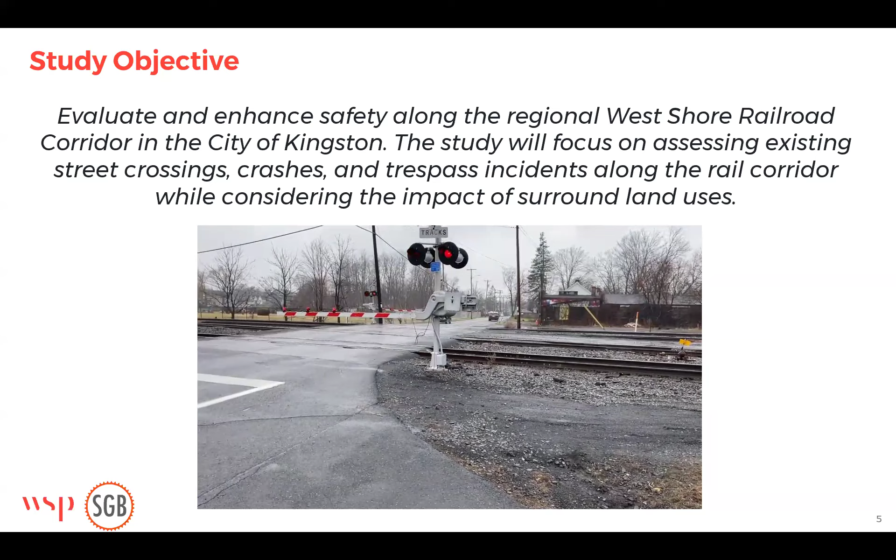So I just wanted to play that video for you guys, and I am very loud, but I cannot compete with that train horn.

But for our study objective, it really was to evaluate and enhance the safety along the regional West Shore Railroad corridor in the city of Kingston. We did focus on assessing existing street crossings, crashes, and trespass incidents along this rail corridor.

Highlighting that video, a lot of what we saw in our crash data dealt with driver frustration due to having to wait at these grade crossings. As you could see in this video, one of the vehicles just made a U-turn and decided to go elsewhere because they didn't want to wait.

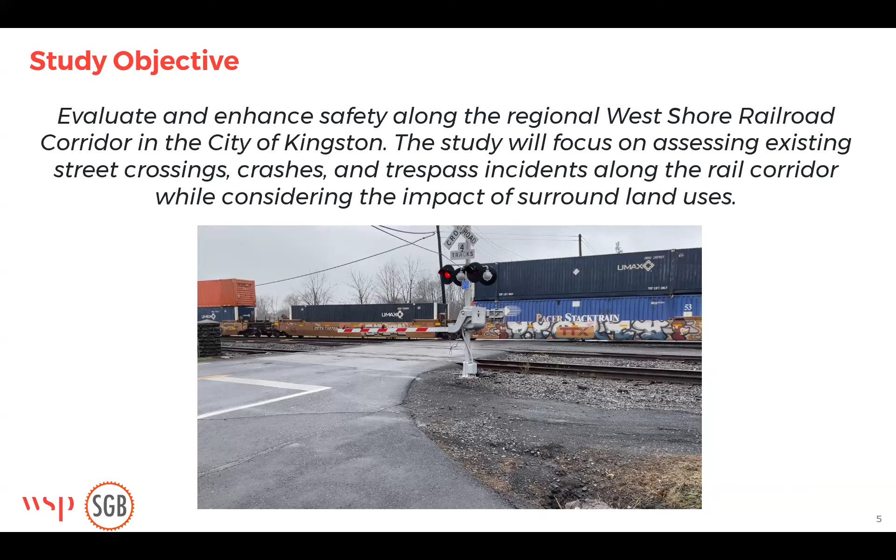As part of our study, we also looked at and reviewed past studies performed in the city of Kingston, including the 2006 Quiet Zone Study and Pedestrian and Safety Mobility Analysis, the 2008 Ulster County Integrated Advanced Train Detection Study and Implementation Plan, the Boice's Lane Rail Crossing Study, the recent Safe and Accessible Flatbush and Foxhall Study, as well as the 2045 Ulster County Comprehensive Plan.

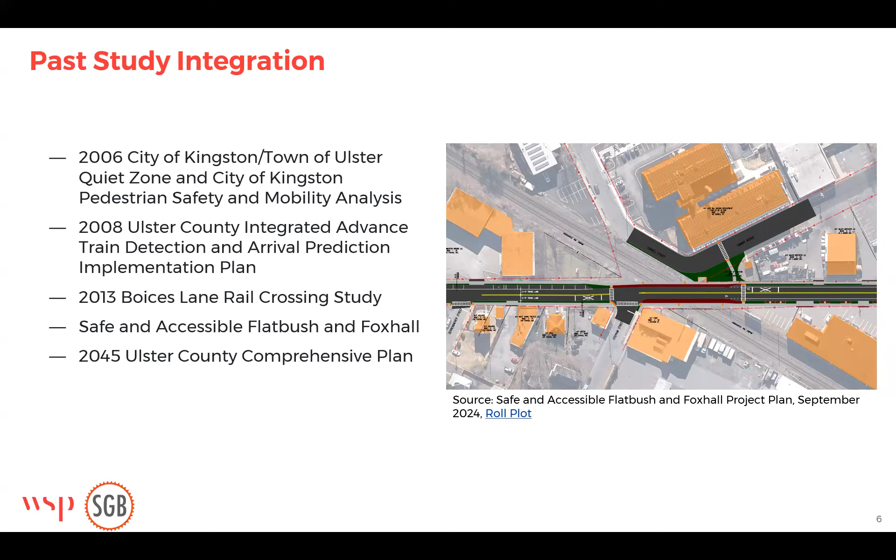Next, if you haven't joined any of our previous public engagement meetings, we did prepare a study video that will go over some of the existing conditions that we developed as part of this study.

Everyone, my name is Steve Noble, and I'm the mayor here in the city of Kingston. The Ulster County Transportation Council is undertaking a rail crossing study to help evaluate and enhance safety along the CSX rail corridor here in the city of Kingston.

We are so excited to be able to get the public's input on the existing conditions and movement of people and vehicles across and alongside our tracks. The public outreach meetings intend to bring constituents and key stakeholders together to help understand how people interact within the corridor. Your presence and expertise will be invaluable to this conversation.

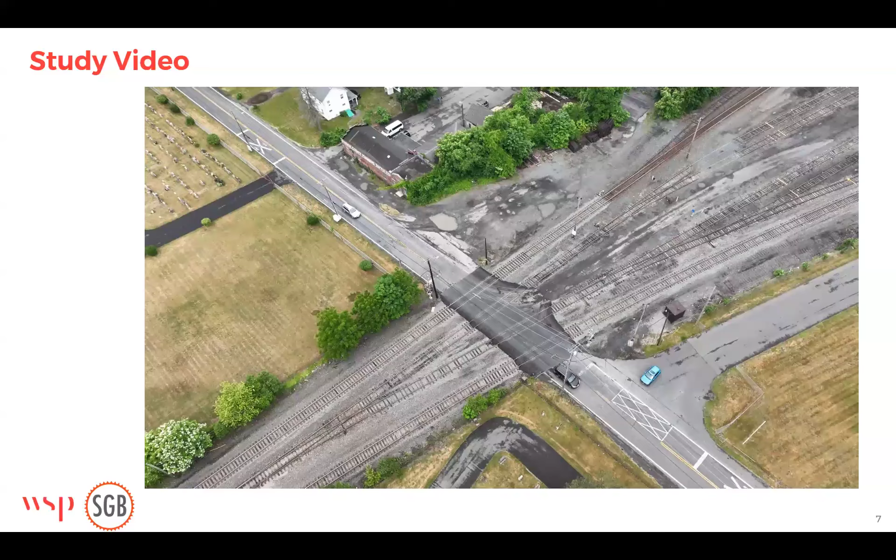The Ulster County Transportation Council is undertaking a rail crossing safety study to assess and improve safety along the regional West Shore Railroad corridor in the city of Kingston. The study will focus on assessing existing street crossings, crashes, and trespass incidents along the rail corridor while considering the impact of surrounding land uses.

Rail corridors in urban areas are common in the U.S. The CSX rail corridor runs through the middle of the city of Kingston and provides challenges for residents and visitors who cross from west to east or vice versa. WSP, in association with SGB, was hired to review the rail corridor and evaluate specific areas for ideas to improve the safety of crossing the rail corridor.

Review of preliminary data and site evaluation indicated that at least 3 areas stand out as focus areas. The first is alongside the tracks between Flatbush Avenue and Cemetery Drive. The second is the at-grade crossing at Foxhall Avenue. And third, the area south of Broadway.

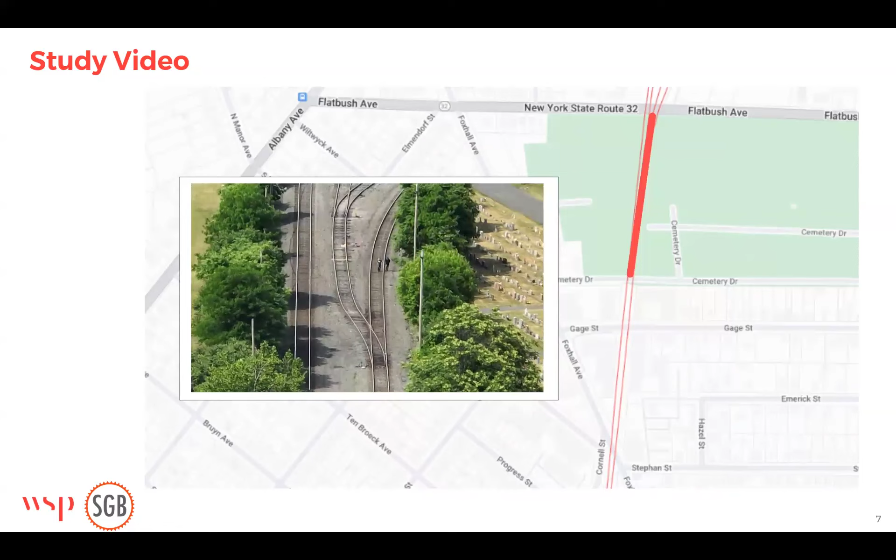The contributing factors in these 3 locations are very different. In consecutive field visits to the study area, trespassing was observed from the at-grade crossing with Cemetery Drive along the rail corridor to the at-grade crossing with Flatbush Avenue. There are known origins and destinations to the northwest of St. Mary's Cemetery that make this a desirable shortcut. As observed in the field, there are visible worn pedestrian paths located here.

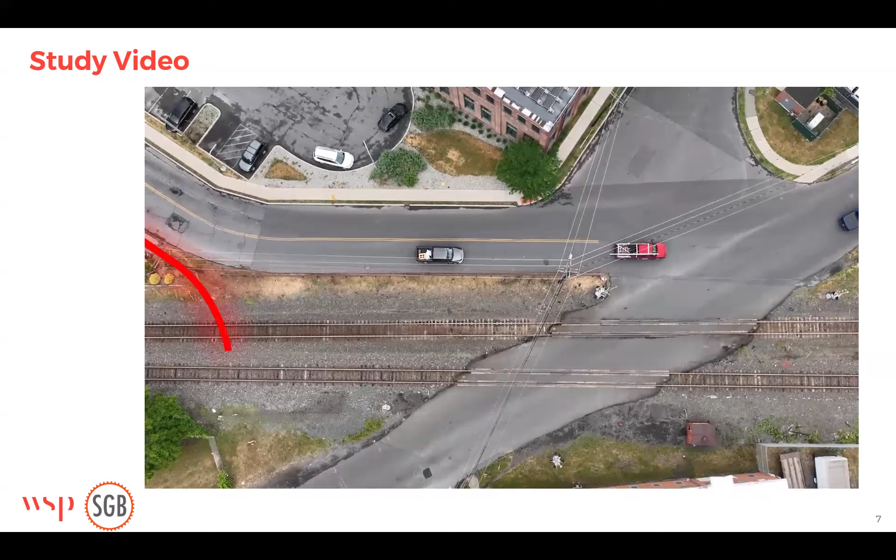The at-grade crossing at Foxhall Avenue is angled with 3 other streets feeding into the crossing. The configuration is confusing for vehicles, and pedestrians seem to cut the angle and cross the rail tracks away from the marked crossings. South of Broadway, there isn't a crossing, but high schoolers and others trespass along the rail line from neighborhoods west of the rail line to access Kingston High School and the YMCA, located east of the rail line. These pedestrians could use the protected grade-separated crossing at Broadway, but that would add several minutes to their journey.

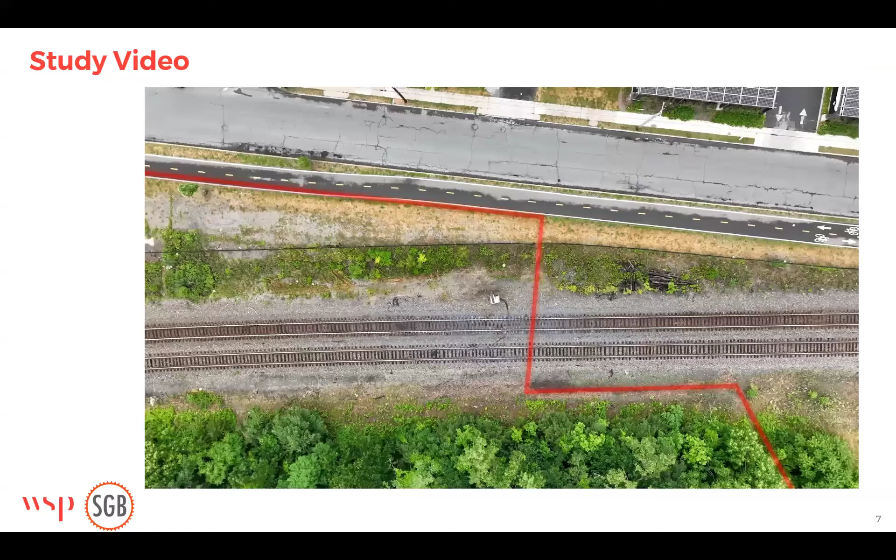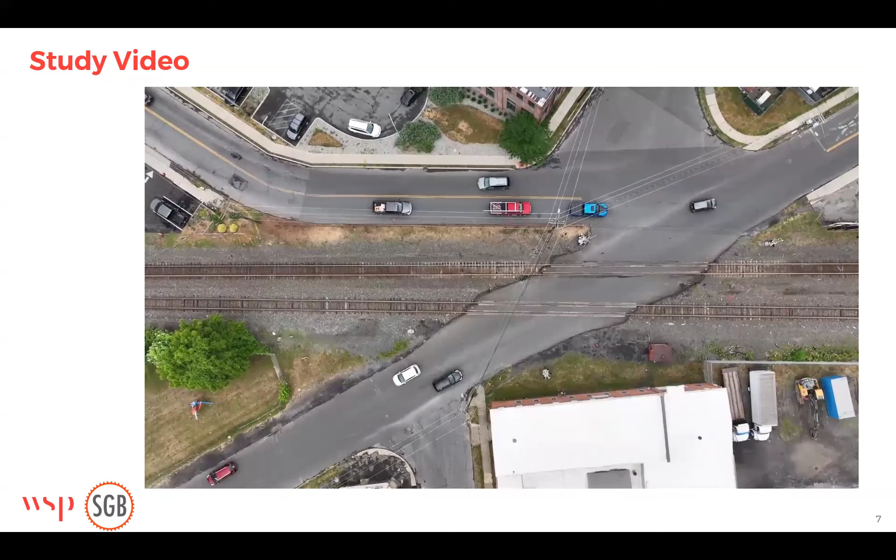Some fencing was erected to manage this trespass activity, but the fence was quickly damaged to allow the activity to resume. As our study continues, additional areas will be evaluated and recommendations to improve safety will be provided to the Ulster County Transportation Council. We strive to get input from the community to inform the study so that the recommendations provide effective and reasonable solutions to improve community safety along the rail corridor.

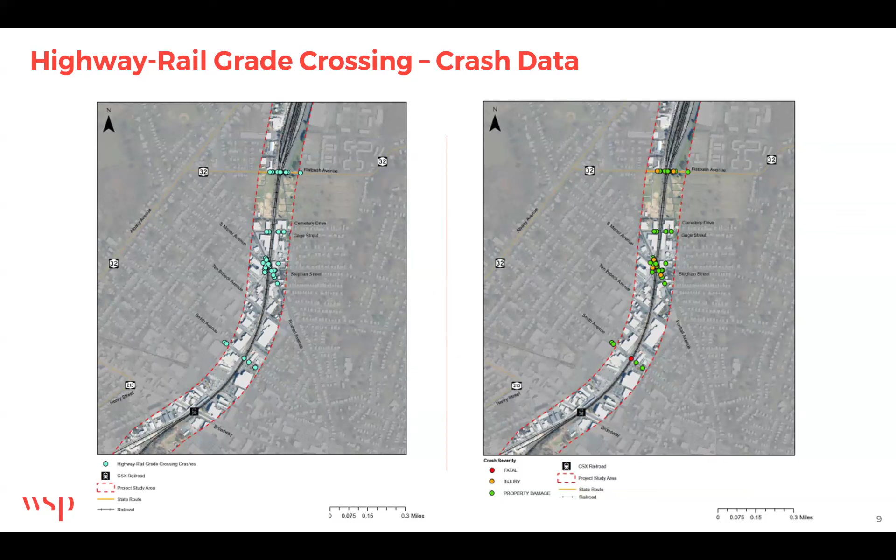We also had 8 crashes that involved a vehicle and a train. 5 of these 8 total collisions occurred at the Foxhall Avenue grade crossing. In summary, with these vehicle train collisions, what we really saw in the data was a lot of drivers going around the gates that were already down, or they happened to be in the middle of the crossing, possibly stopped in congestion, and the gates went down while they were in that dynamic envelope. So a lot of these crashes were due to driver frustration and not wanting to wait for the gates.

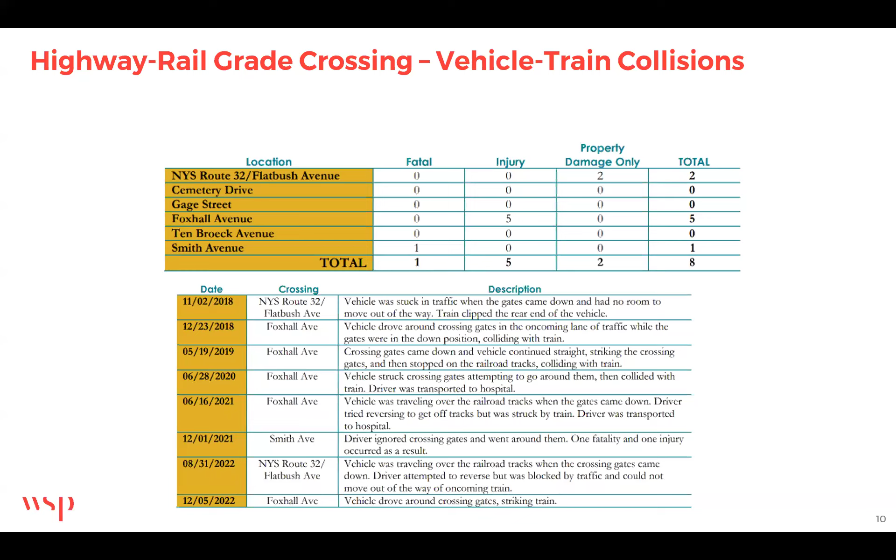Next, I'm going to pass it off to Jim, our rail safety expert, to talk about the trespassing incidences that we saw from our FRA data.

Good morning, everybody. The data we obtained from the trespassing incidents along this section of the corridor came from FRA data as reported by CSX. They're required to report trespass incidents and crash incidents under the FRA requirements. Over a 10-year study, we identified 14 trespass incidents, 10 of which involved fatality, and the other 4 involved injury.

When you look at the locations, this heat map spreads out where the majority of those trespass incidents are. There's no real big pattern other than what was mentioned in the mayor's video. We did see a couple common areas where trespassing is more prevalent: that section between Flatbush and the Cemetery, by the cemetery itself, and then down by Broadway and Greenkill, where people are crossing from west to east to go over to the Y or the high school area.

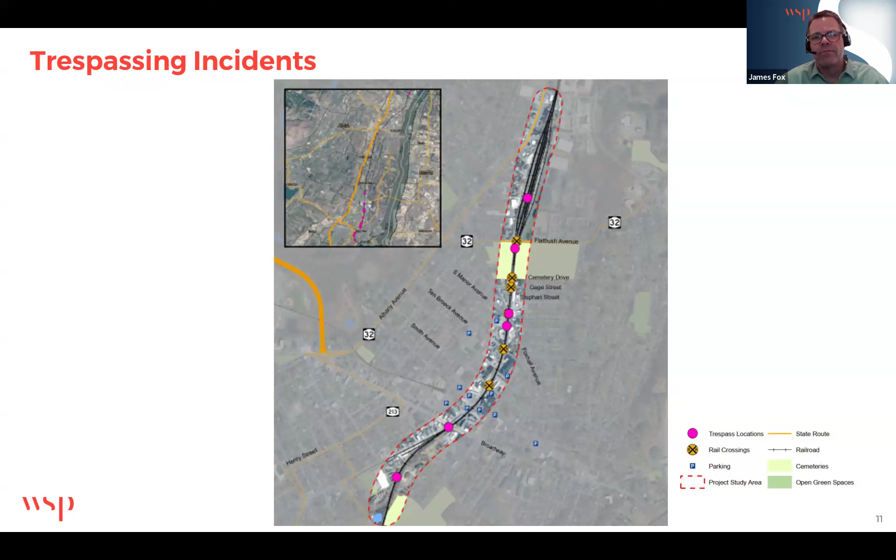When we look at the data for both the crashes and trespasser incidents, one of the things we try to look at is a risk analysis and a vulnerability analysis. Risk and hazard assessment models focus on safety-related acts, and vulnerability assessment models focus on security-related or intentional acts. Trespassing, as an illegal act of walking on the private property of the railroad, is an intentional act, so we put it through a vulnerability assessment model. The other incidents, which are not intentional, we look at through a safety risk assessment model.

The safety risk assessment model utilizes a modified version of the MIL Standard 882 approach for methodology, and the vulnerability assessment model utilizes the American Public Transportation Association security risk assessment methodology through the APTA standard process. Taking the data and working it through the models, we come up with risk ratings and risk scores to prioritize and focus where our highest likelihood of events are, and then we work on developing mitigations for each of those types of events.

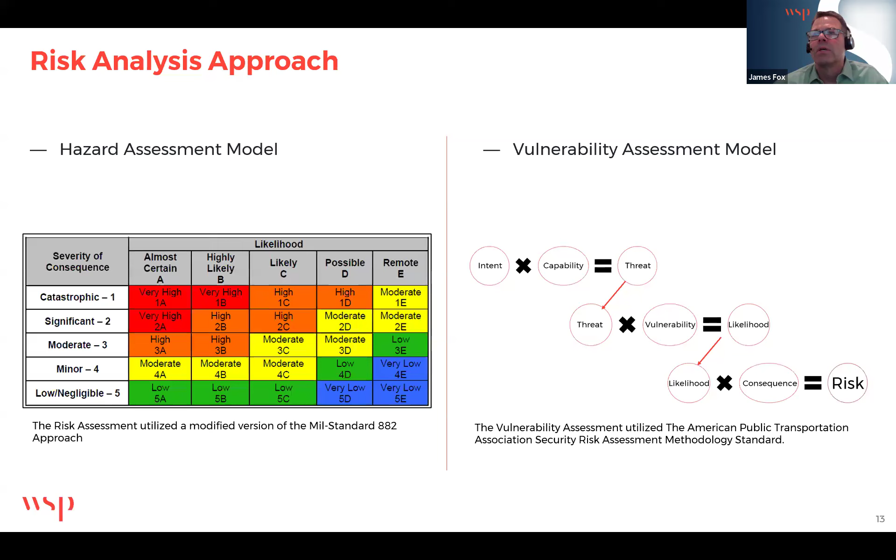If you wanted to transfer to the next slide, we'll go into some of the mitigations we evaluated. When looking at mitigations for the grade crossing environments, we typically focus on a 3E principle: engineering solutions, educational solutions, and enforcement solutions. Looking at a couple of the engineering solutions we considered for improvements along this section of the corridor...

Advanced warning signs and markings: some locations in the current area could see improvements with additional markings, or adding new pavement markings, or restriping the existing pavement markings to make them more visible.

Active gates and flashers: while most locations do have active gates and flashers, there could be some areas for improvement, particularly in the Foxhall area, for improving the grade crossing active warning devices. Because, as mentioned, a lot of people become impatient or try to go around the gates, we're looking at things like 4-quadrant gates or center lane delineators and barriers that could prevent traffic from navigating around the gates, holding them in their current pattern while the gates are active and the train is approaching the grade crossing.

We also considered, because of such a high incident rate at Foxhall, looking at reconfiguring that intersection and making it more user-friendly and a little bit safer for the drivers as they navigate through that unique configuration.

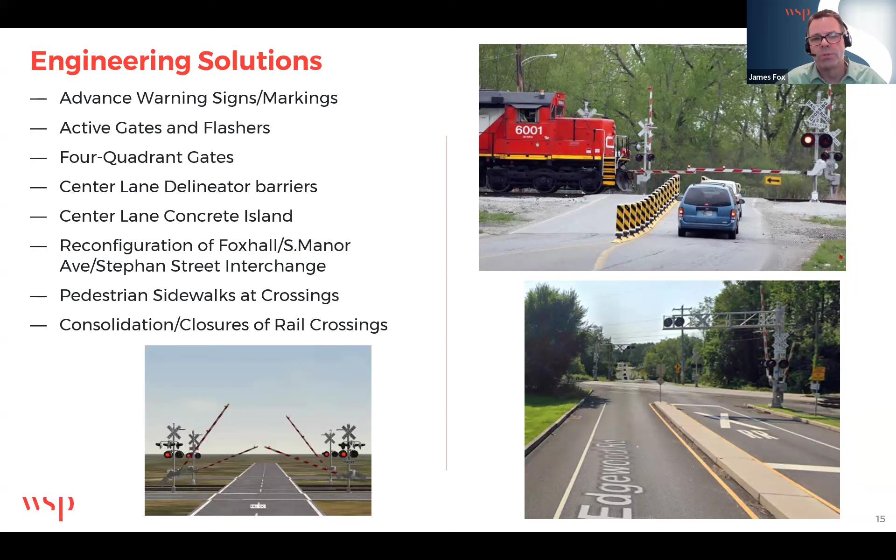Okay, Katie, you can move on to education and enforcement. So the other parts of the 3 E's is education. This would involve working with the community and providing educational information sharing, on-site safety events, and reminding commuters in the area about some of the risks associated with navigating through grade crossings and some of the actual situations being experienced in the Kingston, Ulster County area.

Also partnering with Operation Lifesaver. Operation Lifesaver is a national program that provides a lot of literature and educational information for communities, and it can be tailored to a variety of ages, from school-age children to get them educated at a young age about some of the dangers and risks of not only grade crossing safety, but also trespassing on tracks. This can also be tailored up to driver's ed classes for younger adults, older adults, and even seniors. Operation Lifesaver has done a nice job over the years allowing railroads and communities to partner with them as a resource for additional educational solutions.

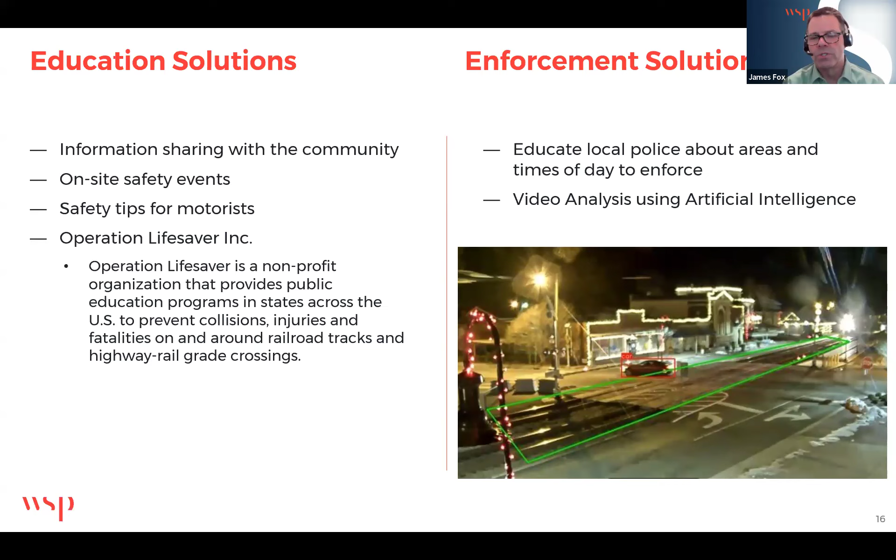As far as enforcement, this is where typically law enforcement comes in to help ensure people that are willfully and illegally acting at grade crossings or trespassing along railroad rights of way are enforced, whether that be through actual police presence on the ground or taking advantage of video technology and newer analytics through artificial intelligence, where you can identify hotspots or patterns of trespassing or illegal activity at grade crossings. Some enforcement solutions were also included in the report.

One thing we wanted to also highlight is that we did factor in quiet zones and the quiet zone study that was implemented back in 2006. Just to give you some background, a quiet zone is where the community can put certain mitigations and treatments in place so that the train horn would not have to be activated at every grade crossing. Now, because sounding the horn is a safety feature, there's a substantial amount of additional treatments and mitigations that have to be put in place if you're going to get authorization from the FRA to meet a quiet zone consideration.

This is something that the railroad does not initiate; it's initiated by the public authority or the local municipality. In order to be classified as a quiet zone by the FRA, you have to meet a series of conditions, basically looking at data and putting together a risk score and comparing the risk at the individual crossing being considered against national averages.

If you are lower than that, that makes you more favorable to be granted a quiet zone. The other, simpler approach is just committing to the FRA that you are going to implement additional safety measures for that location. Those things include 4 quadrant gates, medians in the middle of the center line, delineators, channelization devices, or closing the grade crossing.

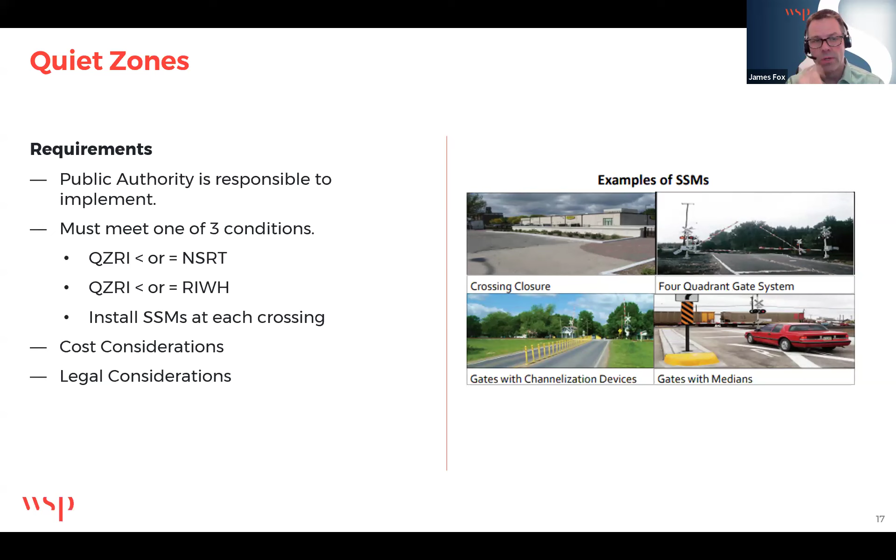So when we looked at the trespassing situations and some of the mitigations we identified, we work around the 3 E's, and engineering solutions for trespassing environments are fencing, and more importantly security-based fencing. While it's not ideal or financially possible to fence in the entire right-of-way, looking at hotspot areas at Cemetery and near Broadway would be ideal locations for additional fencing, maybe enhanced to security rating, which is tougher for the general public to compromise and cut, so it stays intact and does its job of providing a positive barrier between the pedestrian and the rail right of way.

Additional signage to remind individuals about the privacy and private property of the rail right of way, and that it is illegal to trespass. In addition, you could incorporate suicide prevention and mental health hotlines for individuals who might be contemplating suicide, adding that signage along the right of way.

So those were additional recommendations. While fencing is an easy and ideal barrier, we recognize it doesn't always look as good. Even though there's decorative fencing, there are additional solutions that can be as effective, like natural barriers, plants and vegetation that could also create a barrier between the public corridors and the rail rights of way. We've identified these in this study as well.

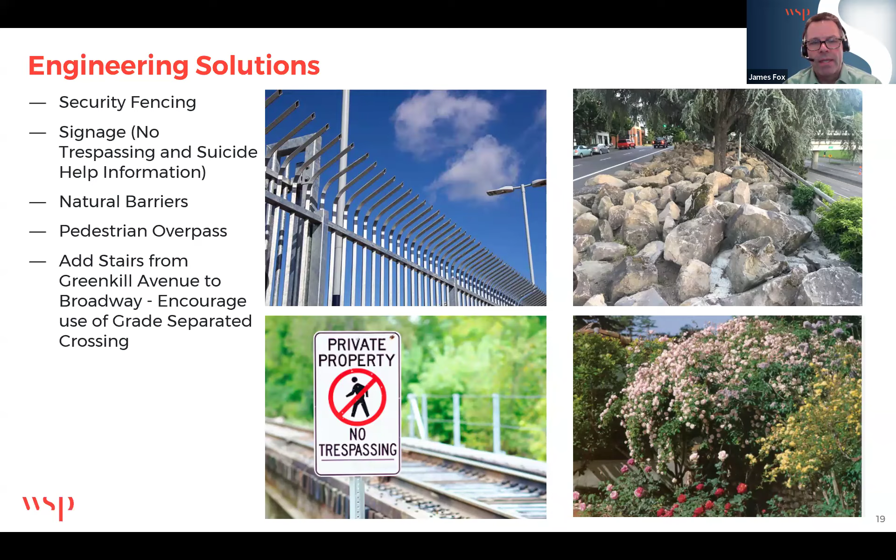Let's go into the education and enforcement solutions, which are very similar to what we identified in the grade crossing environments. This includes additional community information, educational campaigns, awareness, safety events, and blitzes to educate the public, also tapping into Operation Lifesaver. From the enforcement standpoint, for trespassing environments, if you know of concentrated areas you can add cameras and intrusion detection systems that monitor and activate when individuals walk through high traffic areas or areas where people commonly use as footpaths to cross the right of way. We've identified these as potential solutions too from the enforcement standpoint.

Okay, the recommendations, and Katie, I guess we'll tag team on this. So a couple of things, a picture's worth 1,000 words. A couple of things we suggested in the recommendations to summarize without going into detail line by line.

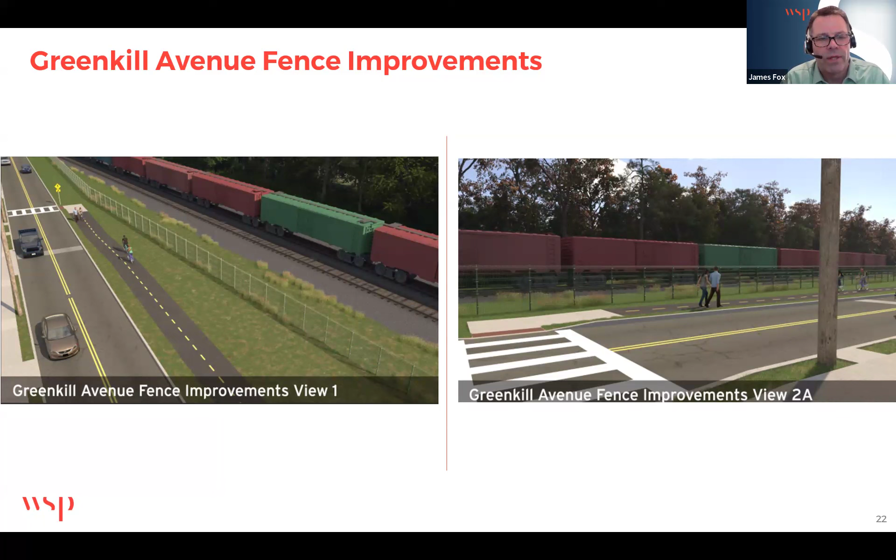This is a visual cue to the drivers, especially if there is congestion in the area and drivers tend to stop on the tracks and back up if traffic in front of them stops. This will be a reminder of the area you do not want to stop in. If you're in that dynamic envelope, you have a likely chance of getting struck by a train if you can't clear the gates in time, if traffic doesn't clear itself. So adding that pavement marking there.

Next slide. Okay, did you have something else?

So the rest of the renderings and recommendations can be found in the project report that Brian has posted to the project website on Participate Ulster. You can send any additional questions and comments to uctc@co.ulster.ny.us.